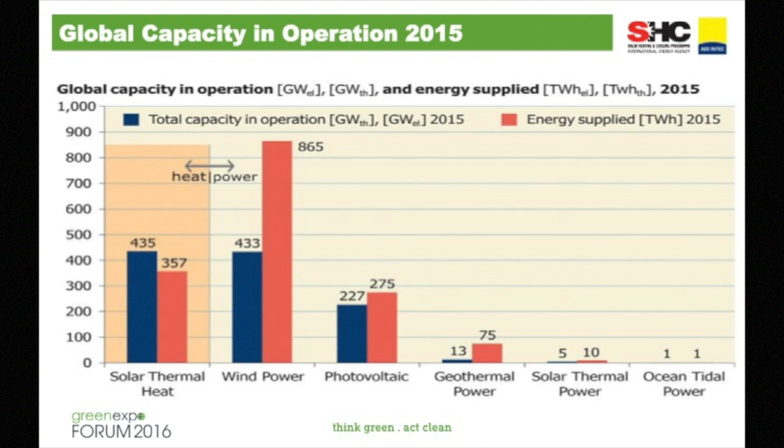The red bar shows you the energy supplied by these technologies, and you can clearly see with wind, if you have a good location where you have windmills, you can run it 24 hours, and this shows you more or less the full load hours. But what I just wanted to mention here at the beginning is the highest installed capacity is on solar thermal heat, or heating and cooling.

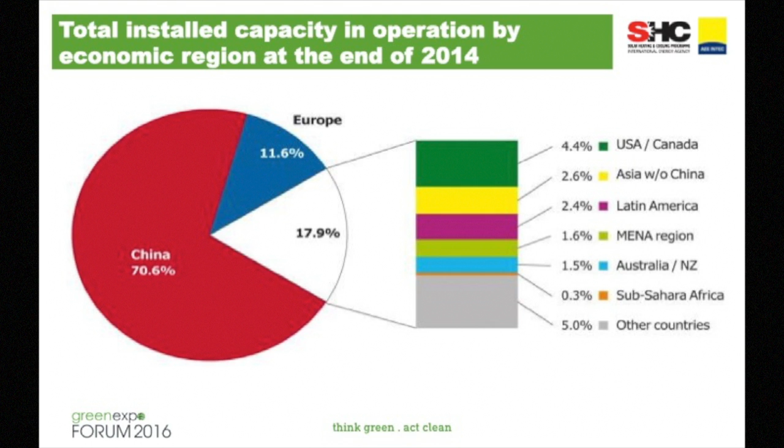And this is astonishing because China and also Europe are not known as being in the sun belt of the globe. So there's something behind it, why they use it in these countries and regions. It's basically also what Bärbel Epp said before. There were policy support measures behind it. This was mainly the driving force. It was not the source available. But you can imagine in the MENA region, there's the source. You have double the solar radiation usually compared to Europe. That means for the same installation, you get double the output. So there is room for a lot of installations.

If you look on the top 10 countries worldwide, then as I mentioned already, China is leading by far. So the bar goes to the second floor here. We just had to minimize it here to get the other countries on it. The different colors show you the different collector technologies. So the blue one is the unglazed water collector, usually used for swimming pool heating.

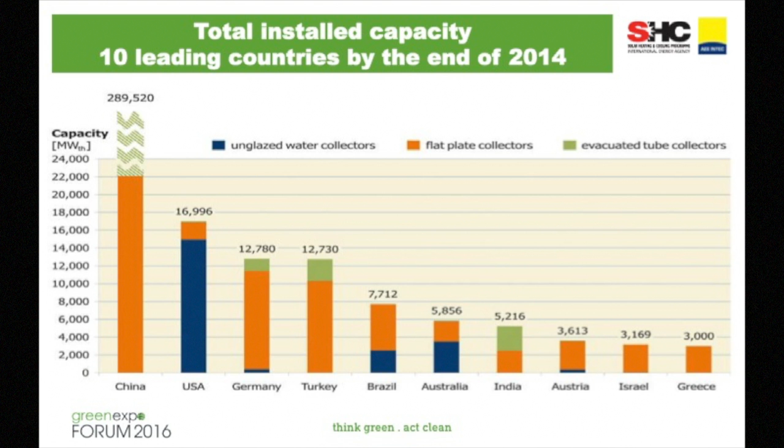Then you have the orange part, flat plate collectors, and the green are representing evacuated tube collectors. So the top 10 countries, starting with China, then you have in the US a very special market, mainly focused on pool heating, then Germany, Turkey, and so forth. But these are the 10 leading countries, and nearly all of these countries have really political support measures behind it. It's either obligations or other support schemes. So that's usually the driving force.

If you look on the top 10 concerning total installed capacity per 1,000 inhabitants, then it gives you a completely different picture, because this gives you an idea of the market penetration. And then you have Austria. As you know, Austria is not really known as a very sunny country, but we are leading in terms of installed capacity per inhabitant, followed by Cyprus, Israel, Barbados, Greece, the Palestinian territories, Australia, and then you have China on number 8 concerning installed capacity per inhabitant.

And I think that gives you a slightly different picture. Coming myself from a small country, I don't like it if you have always the big countries. They're always leading because there are just a lot of people, and also here in Qatar, there's not so many people, but the question is, what is the market penetration per inhabitant?

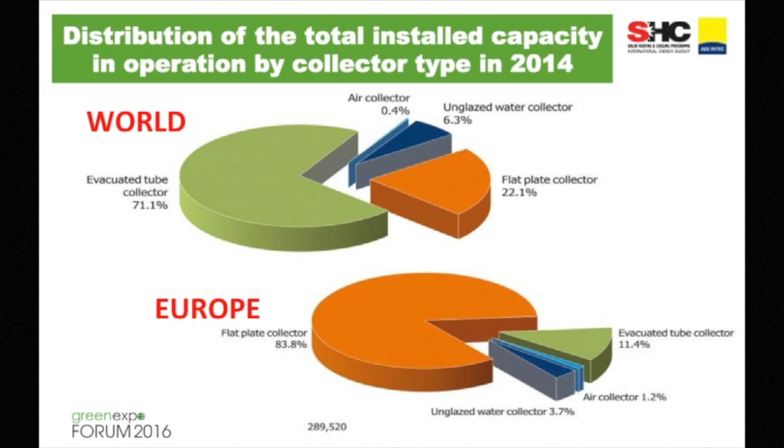The distribution of the total installed capacity in operation by collector type, again, two completely different pictures. If you look on the worldwide scale, because it's dominated by China, 70% is evacuated tube collectors, about 22% is flat plate collectors, and then you have a small share, 6% uncovered, unglazed water collectors, and a few air collectors. If you look just on the European market, it's exactly the opposite. 83% is flat plate collectors, a small share of 11% evacuated tubes.

Distribution by type of collector, again, very different in different economic regions of the world. If you look on the worldwide scale, it's 71% evacuated tube, 22 flat plate, and in the MENA region, it's 92% flat plate collectors and just 7% evacuated tube here in the Middle East and North Africa.

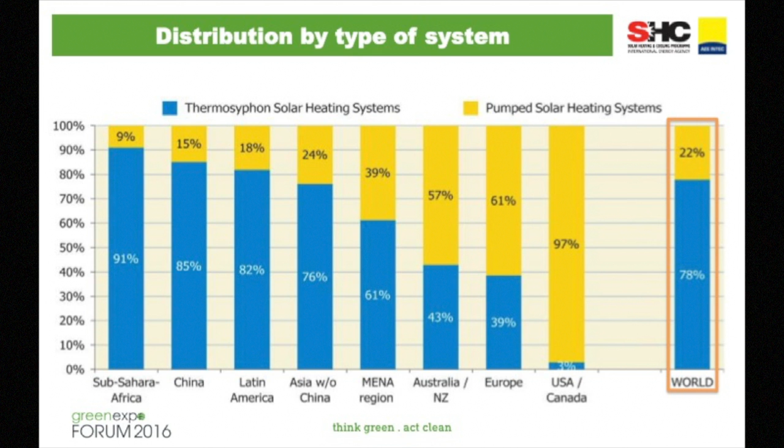By type of system, generally you have two types of systems. One are the pump systems, so you run a pump in order to get the hot water to the tank, or you have thermosiphon systems, basically driven just by density difference. You don't need additional energy. So that means they are usually used for the small-scale solar water heating systems. And again, here in the MENA region, it's about 61% thermosiphon systems and nearly 40% pump systems. On the worldwide scale, it's 78% thermosiphon and 22% are pump systems.

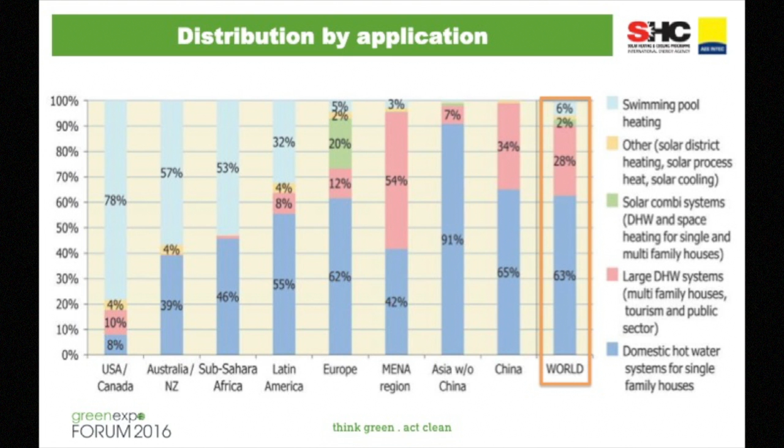If you look to the distribution by application, then the main application worldwide, 63%, is domestic hot water for single family houses, but then about 28% is for multiple family houses and hotels, so in this medium scale, and about 2% is for district heating and process heat.

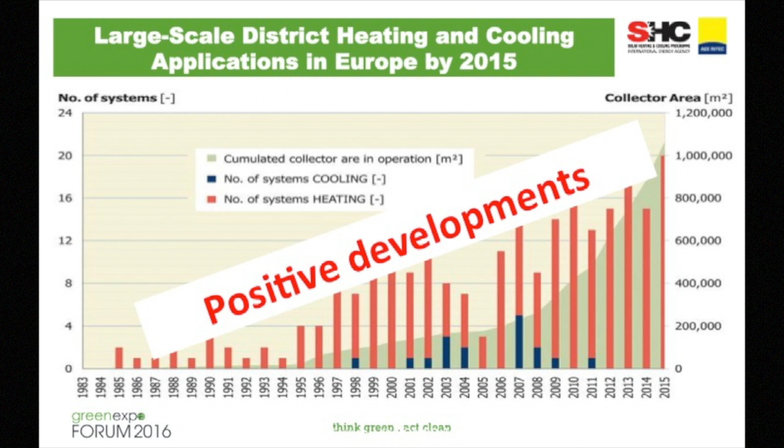And this shows really very positive development, especially these large-scale district heating, heating and cooling networks in Europe. You can see here about 1 million square meters are installed up to now, and at the moment about 20 systems are built every year, mainly in Central and Northern Europe. If you look a little bit more in detail, then you can see the leading country here is Denmark, with about 80 systems installed already.

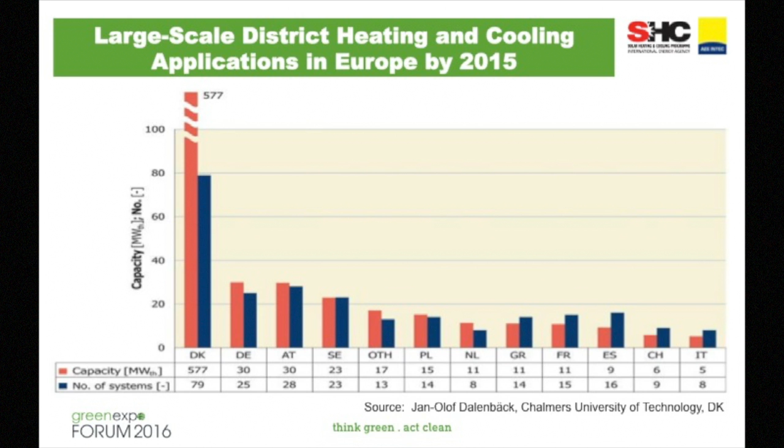So total capacity of nearly 600 megawatt installed. And it's about 10,000 square meter one system, so relatively big systems compared to the second and third country, Germany and Austria, in the range of 25 and 28 systems installed up to now, and the capacity is 30 megawatt. So it's, on average, about 1 megawatt per system, so significantly smaller compared to the Danish systems. But this is a growing market.

And just to give you an idea, that's a picture from Vojens in Denmark. It's the biggest up to now. The collector capacity is 37 megawatt installed capacity, so 50,000 square meter one system. And on the left-hand side, you can see the pit storage. So it stores heat from summer to winter in a huge water storage, and they extract the heat during winter time to use it for space heating.

And an even bigger system is under design at the moment. It's a 450,000 square meter system in Austria. So in the design stage, this will be significantly bigger than this one, with about 1.8 million cubic meter of water as a seasonal storage.

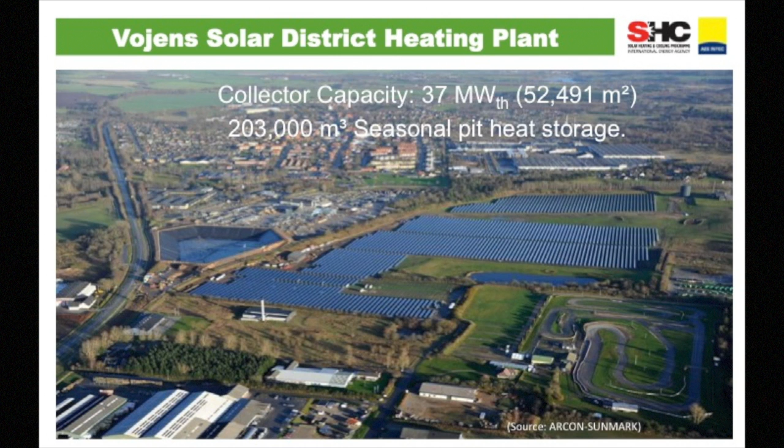But these systems are not just in Central Europe. We were involved about 5 years ago in Saudi Arabia, in Riyadh. At that time, it was the biggest system worldwide with 36,000 square meters, so 25 megawatt. This system is installed on a flat roof, and it supplies a new part of the city of Riyadh and the Princess Noura University. This is just showing you the short-term storages, 6 times 200 cubic meter.

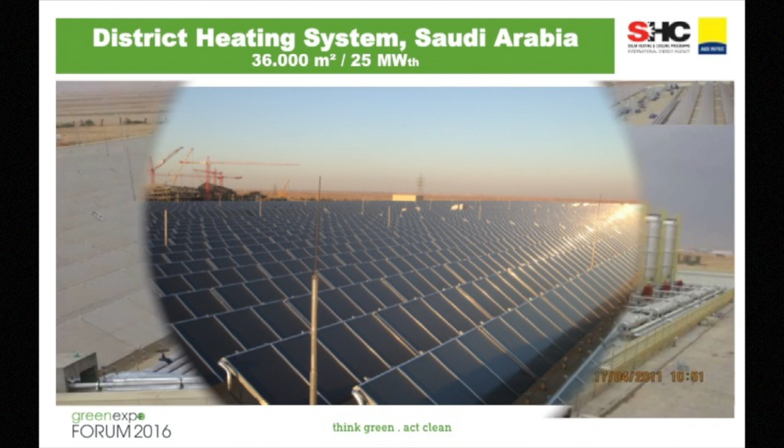And this is how the collectors look if they are not covered, because we had to cover them first, because just to fill the huge system was not so easy in Saudi Arabia. And this is connected also to a district heating in this new part of the city of Riyadh. So district heating and district cooling you can do, of course, also here in the region. As I said, 5 years ago, it used to be the biggest system worldwide. It was mentioned already yesterday by Daniel Mugnier.

The cooling systems in operation worldwide, it's about 1,200 systems, so it's an early stage compared to the overall cooling market worldwide. And very important also, solar process heat. So applications here, there's a huge potential. There's a lot of food and beverage industry, but also mining industry, where there's a huge potential for heat and cooling, of course, as well.

So in the large system range above 1,000 square meters, we have documented about 21 systems worldwide. Then in the range between 500 and 1,000 square meter systems, 35, and so forth. If you want to have a look in detail, we have a very nice database for all these systems worldwide, where you find all the details.

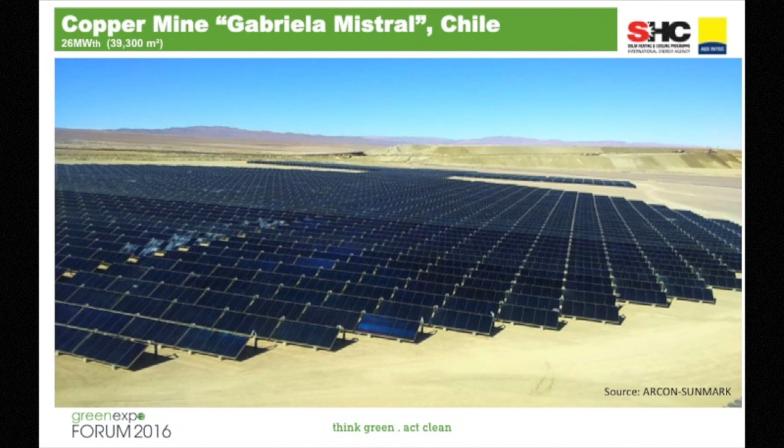This is at the moment the biggest one, the copper mine in Chile. It's in the Atacama Desert, where they use these collectors in the copper mining field for electrowinning and the leaching process. And I think that's really important. In these regions, there's plenty of sunshine, there's mining industry, and they need low temperature heat. And unfortunately, I don't have a picture here. There's a big system under construction at the moment from the company GlassPoint, a concentrated system for enhanced oil recovery here in the region.

The number of jobs, finally, there's quite a big number of people working in this field. It's 730,000 people working worldwide in the production, installation, and maintenance of solar thermal systems. And also the turnover, I think, is quite good in the meantime, 21 billion euro or 24 billion US dollars. So it's a significant turnover of the solar thermal industry.

And with this, I hope I could give you an overview on solar heating and cooling technologies, what's on the ground. And hopefully you're eager to install some more of these systems also here in the region.